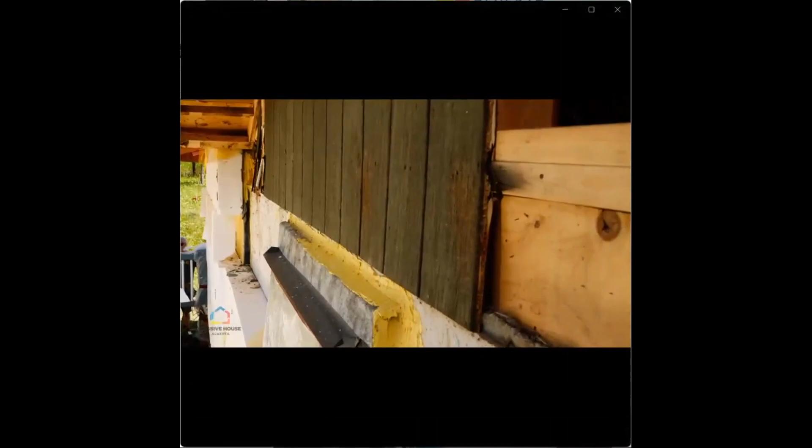So in any deep energy retrofit, one of the first steps you have to do is disassemble a little bit just so you can actually find out what is on site and what's existing. For this project, once we removed the existing siding, we found that in some parts there was stucco. The stucco was determined to be airtight enough that anywhere we came across cracks, we were able to seal them. For another portion of the house, we just found wood.

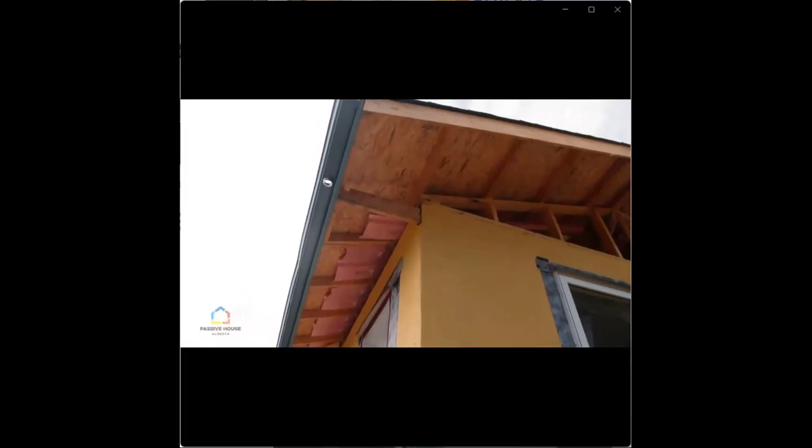In that case, we applied a liquid applied air barrier. For this attic space here, what we ended up doing is removing the sheathing so that we had access to the attic, and that allows us to gain access as well as remove any insulation that needed to be fixed. It will be reapplied, and then we will be air sealing it once we're done the project.

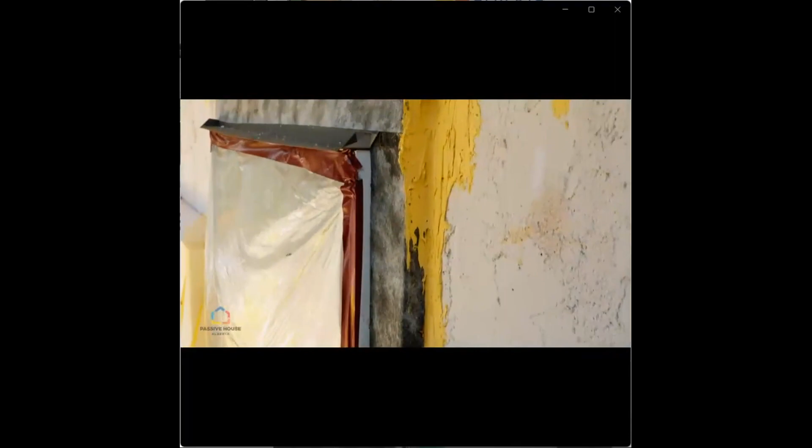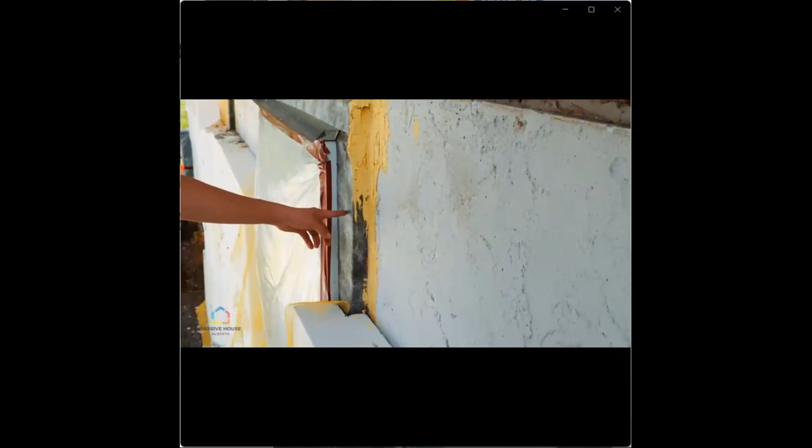So this detail here, we're able to see how with the existing window, we're able to tie it into the stucco so that we have a continuous air barrier. We did use the EIFS tape. We did find that the adhesion between the EIFS tape and the stucco wasn't enough to get a really solid air barrier, so this is where we used the liquid applied flashing.

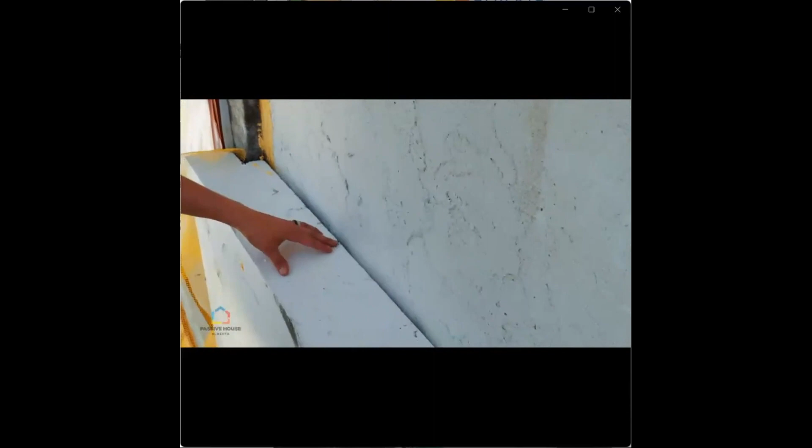So with this detail, you're able to see a drainage gap in between the existing wall as well as the insulation layer, and this is created by the trowel marks when the cement is actually applied, so that any moisture that comes out of the wall is able to drain down and out.

What I really liked about that video is, first of all, that Celia is one of two tradeswomen that are actually part of Peter Darlington's Solar Homes crew. So it's not just tradesmen, it's tradeswomen working on these deep energy retrofit projects. This is what that project was.

It's also showing that when it comes to air control layers, it's not just one material. It's always a combination of materials that go together to create that continuous air control layer all the way around the building. A lot of what I deal with often is not necessarily one system, but the transition between systems. So that video delineated a couple different potential systems there.

I would be interested in how the transition between stucco and sheathing air barrier happened. Any penetration details, that sort of thing—that would have been really integral. That's where these systems tend to fall down.

Yeah, so obviously that's just the shorter one. I think we're at that location for 15 minutes, and we do spend a lot of time showing the majority of the locations there.

They use the yellow stuff, the individual goo—not the correct term—but they also have a different type of trowel-on air tightness membrane that generally goes over top of all the sheathing. They have that black stuff and also a fiberglass tape that transitions over the joints. So we do show how they transitioned over a bunch of materials to make sure you get that continuous air barrier.

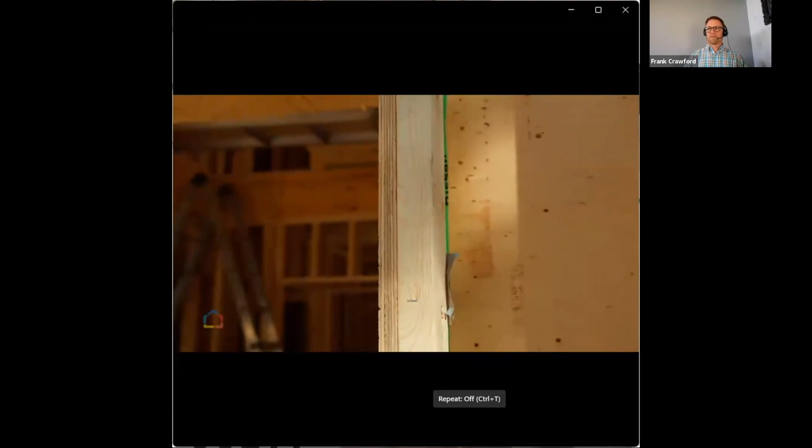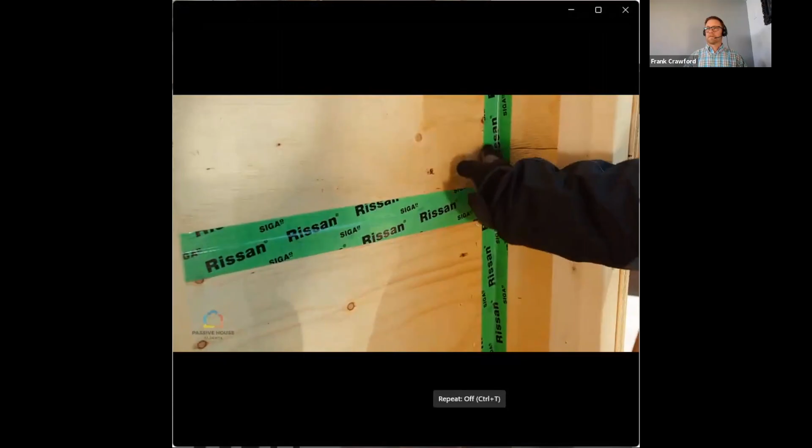As we continue out this deep window rough-in, the plywood that we saw from the inside is acting as a combined air and vapor barrier. So all of the joints have to be taped with a high-performance, vapor-tight, stretchy tape.

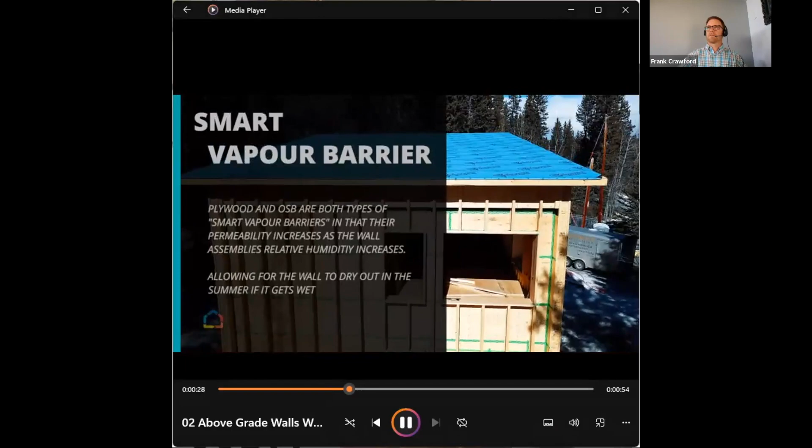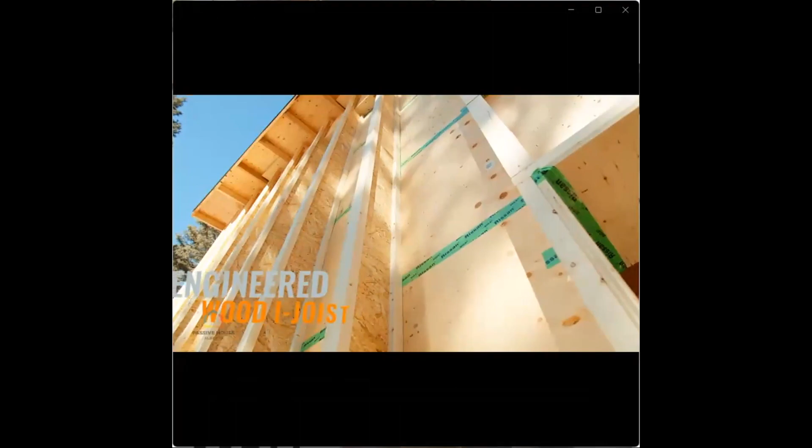To increase the insulation, they make a cavity. The cavity is made with a TJI or a wood I-beam, and then this cavity is covered with wood fiberboard and a weather-resistant barrier. The cavity is filled with dense packed cellulose. So when you take all these different insulations, it ends up as a very high-performance wall system, called either a TJI outrigger, an I-beam outrigger, or sometimes just another type of split insulated wall.

From the inside, this is a very typical 2x6 framed wall. They still try to use advanced framing techniques to minimize the amount of lumber, but it is your basic standard construction. But if we come to this window, you can see that it's sheathed with plywood, and you can tell by how deep it is that it really isn't a code minimum wall.

What I liked about that one is it brings up the concept of a combined air and vapor barrier. In this case, it's actually a combined smart air and vapor barrier using half-inch thick or thicker plywood. It's showing a relatively innovative wood I-joist and dense packed cellulose wall assembly, showing how that plywood is transitioned out. There's another video in this series showing how we connect all the membranes at that wall assembly — we might show that later today. This one was a different single family home, new build.

Questions on this one? What's the permeance of the plywood?

Plywood is what's called a smart vapor barrier. A smart vapor barrier is any material whose permeance changes based on the relative humidity of the cavity on either side. So plywood, when it's over half an inch thick, and OSB, when it's over about 7/16 — basically half an inch thick — has a permeance rating less than 1 perm. Less than 1 perm is what Canadian Code classifies as a vapor retarder, or can be used as a vapor control layer.

So here's the window installation in this wall. This deep wood window rough-in buck-out serves a number of purposes.

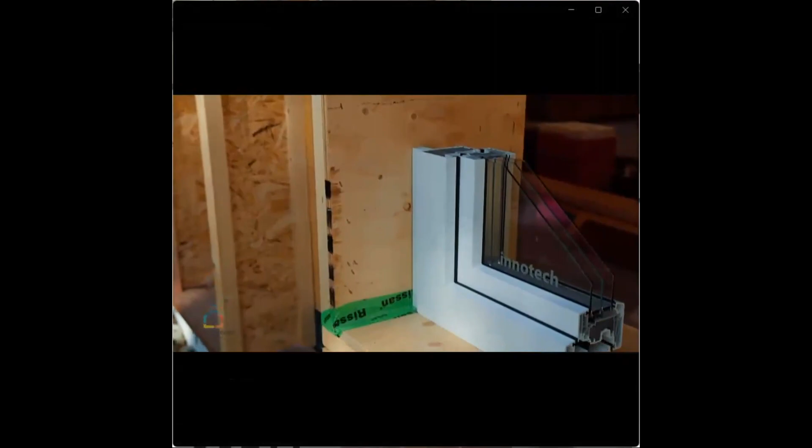The primary purpose is to transfer the vapor barrier from the inside to the outside, because the plywood is a vapor barrier when taped with high-performance tape. The second function is that when the weather-resistant barrier applied to the outside is returned back in, it connects that membrane from the outside to the inside. Finally, it gives us lots of structure to install our high-performance triple-pane windows anywhere within that rough opening. Ideally the windows are installed in the thermal center of the wall, because that's where they perform highest, but that might shift an inch or two depending on the actual window install detail.

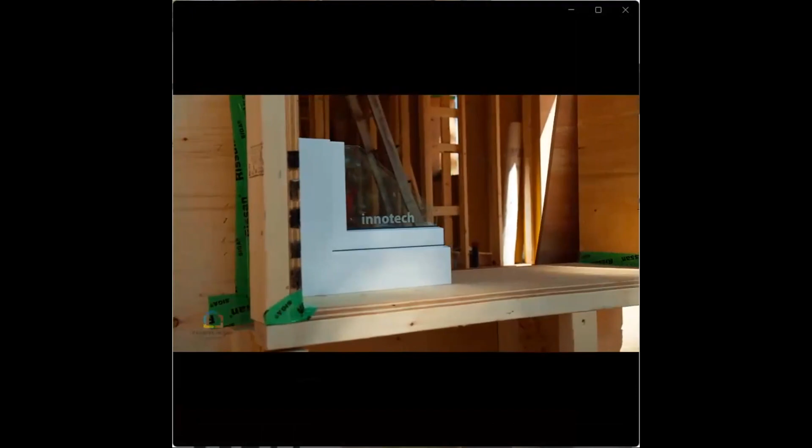Talking about windows, there's a number of different factors that make up the total performance of that window. Obviously there's the glass, there's the frame, but equally important is how that window gets installed. Because if you have a really high performing window and you install it poorly, the window will perform poorly. So we want to maintain the performance of that window.

So here is one excellent detail on how we install this window in a high performance building. First of all, we structurally attach the window. You can use clips or screws - there's various different methods depending on the installer.

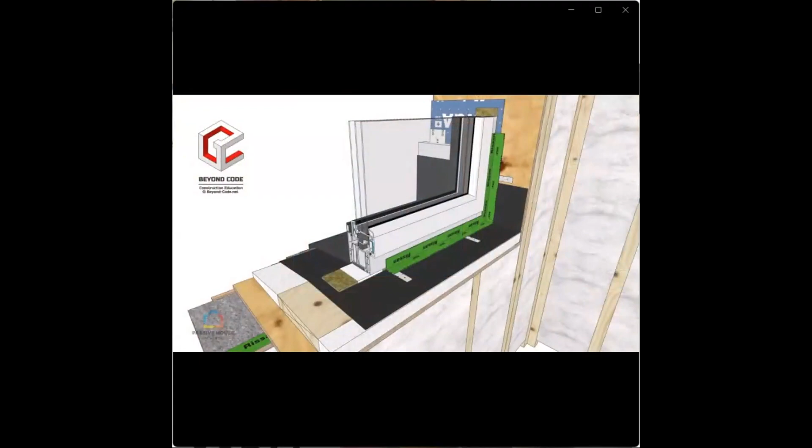But then on all four sides on the inside, we use a high performance tape to connect the vapor barrier of the wall to the vapor barrier of the window, because the window is part of your air and vapor barrier system. That tape is high performance - it's very sticky, it's stretchy, and it has similar permeance ratings as the rest of the assembly. The reason you want it really sticky is because the wall might move, the window might stretch over time, and that stickiness and stretchiness maintains the air tightness over the 50 to 100 years that this wall and building are going to be here.

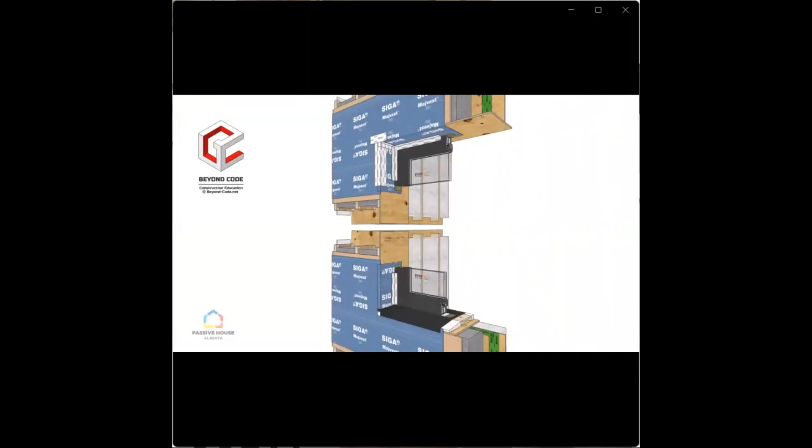So all four sides are taped, wall to the frame, on the inside. On the outside, at least the top three sides are taped - the sill on the outside is dealt with a little bit differently. Next, we want to reduce the thermal bridging of this installation. On the jambs and on the head, they've installed about a half inch of insulation, which helps reduce thermal bridging of this connection detail. On the sill, because the outside slopes down and you can't really insulate it on the outside, we've put about 2 inches of insulation on the inside of the sill. All of these details combine to make an excellent high-performance window installation.

So here's the next progression on that window installation detail. Remember, we still have the foam here, behind this piece of wood. We now put the drywall on. The drywall gets mudded, taped, and painted. You can caulk the seal - it's not part of the airtight membrane, it just gives a nice look.

You might want to put a more durable material on the sill, because people often put pots or plants there since they have a nice deep sill. But you want to make sure you leave enough space so that when you open your operable window, you're not hitting any of the materials. You can still hide as much of that frame as you can with insulation.

So for that one, you might have noticed there were some really cool SketchUp models shown. I agree, they are really cool.

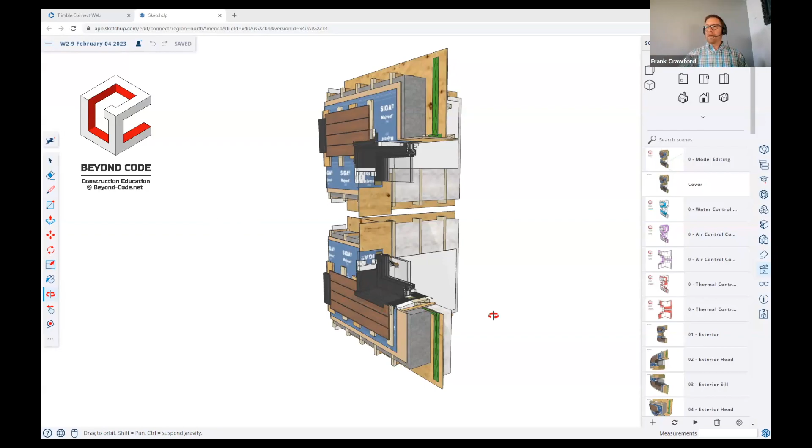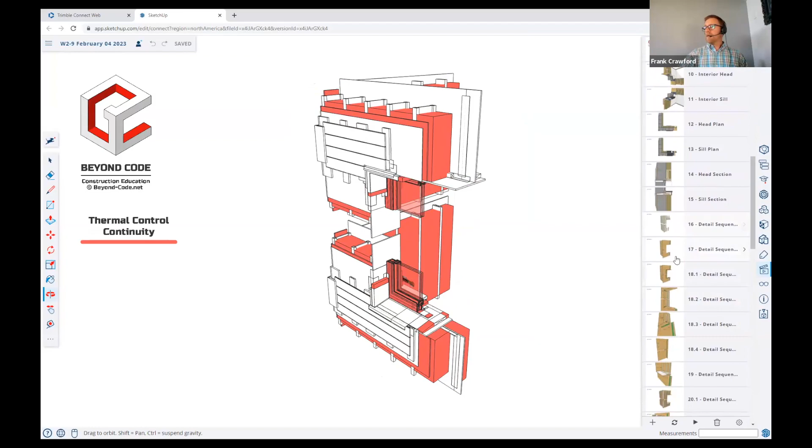They have all of the layers visible, and you can actually move it all around. They'll show you the water control and air control layers from the inside and outside, and show you where all the insulation is. You can even use these items as a virtual wall mock-up so that you can build the building step by step - studs, sheathing, basically every single step of the build.

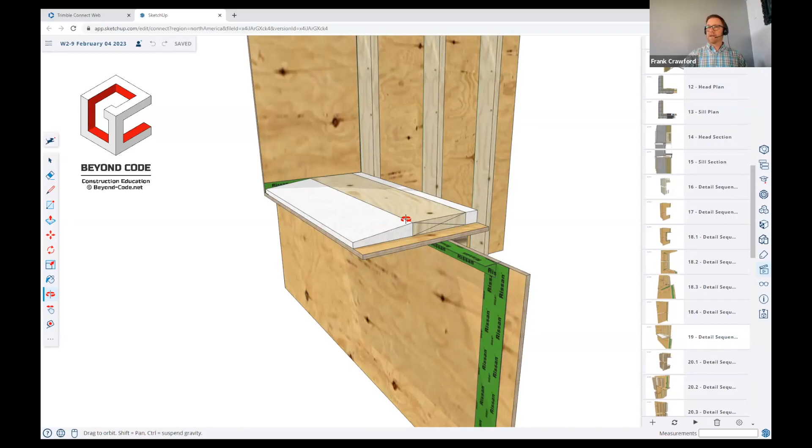I like this detail showing that the sill has a steep flashing. We try to say it's a 4 in 12 slope, treat the sill like a small roof, so some sloped insulation.

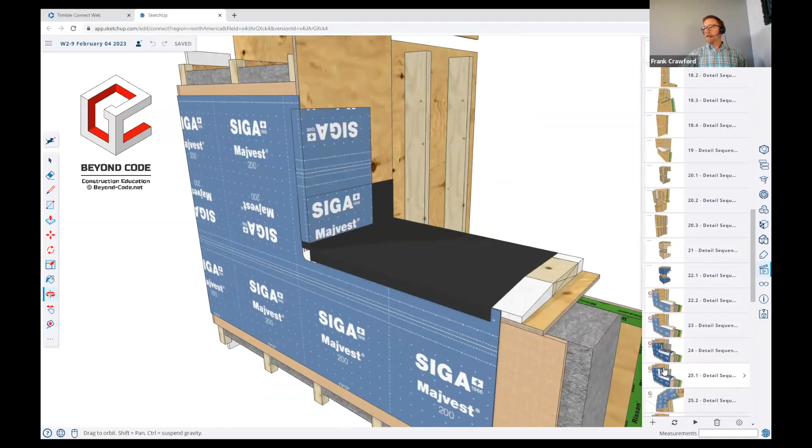Basically it walks you through step by step every single one of the details, showing you exactly how you flash it. There's obviously a number of different ways you can flash it - this is just one of the ways - but it walks you through each step. So you can use it as a virtual wall library, a virtual mock-up, and use it for education for your trades. They give you PDFs that you can give to the trades on site and say, just do it this way. So this is another excellent educational tool.

If you want access to these, they have a growing library that you can purchase for a fairly low rate. If not, they will help you develop custom wall assembly details for any wall you're used to using. This is another great resource we found as part of the grant, and they are offering these for sale. There's the link, beyond-code.net. So any questions on any of these items?

Do we have details? Hopefully the mundane, flanged window walls are fairly well detailed. Do we touch on them? We do touch on them briefly in one of the shorter sections of the videos.

We were actually at Steve Norris's house, and he used a flange window detail on his garage. So we do touch briefly on flanged windows, but most of the other installation details shown here, because we're doing the passive house and high performance method, are flangeless windows. They're installed somewhere around the thermal center of the window, which, if it's flanged on the outside, is not often the thermal center, but depending on your wall assembly, it can be.

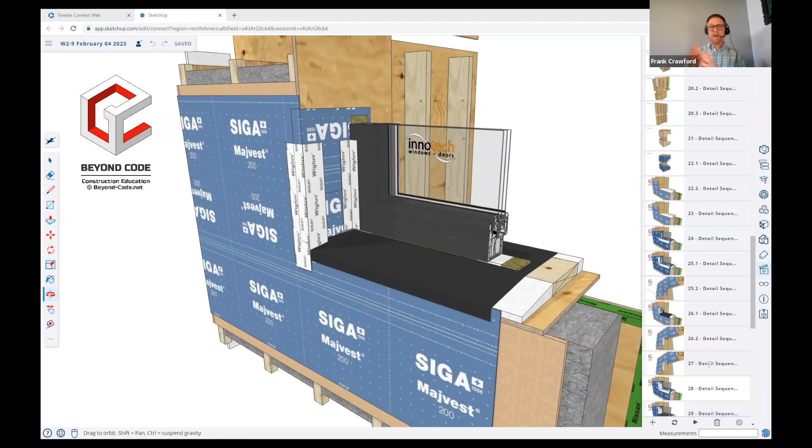Let's continue the conversation about air tightness and connection of those details, staying at Bragg Creek, and look at the connection between the walls and roof.

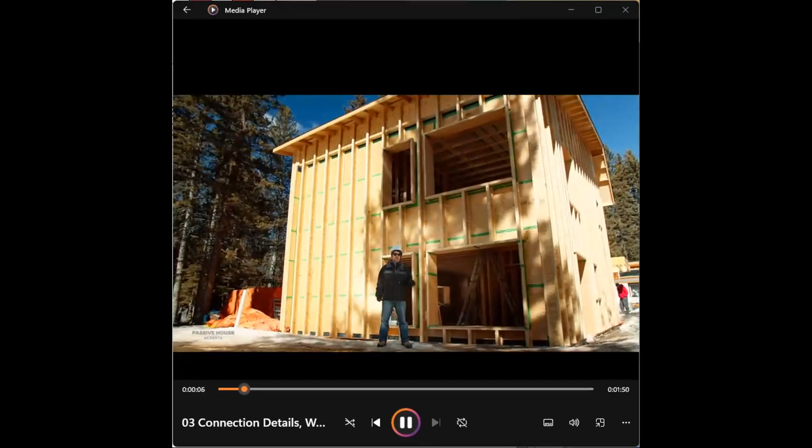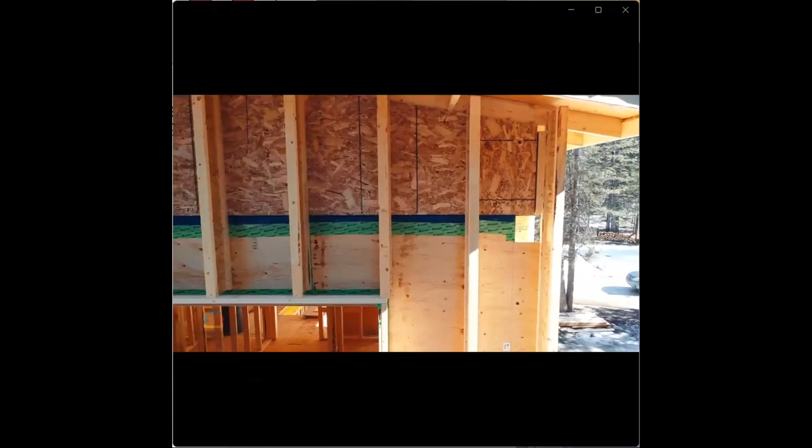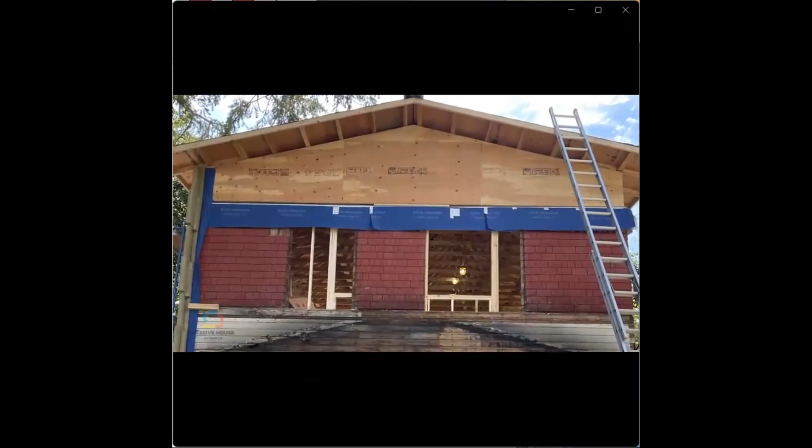Continuity of the air and vapor barriers is paramount in any high performance and passive house building. If you look up to the second story, you'll see that blue strip - that's a strip of weather-resistant barrier placed on top of the wall before the trusses are installed. That allows continuity from the exterior weather-resistant barrier to the inside weather-resistant barrier and vapor barriers, so you get a nice airtight building.

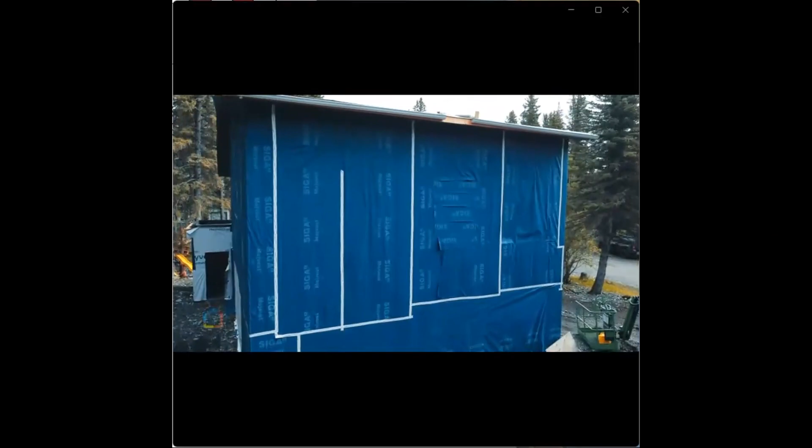As you can see, our wall assembly has progressed so that most of the critical barriers are complete. Remember, the plywood sheathing on the inside is our air and vapor barrier. We have the TJI stud filled with dense packed cellulose, on top of that wood fiber board, and then on top of that a water resistant membrane.

Here we're using the SIGA membranes. It's not part of the air barrier system, and because it isn't, the staple holes and everything don't have to be sealed. If this was part of the air barrier system, these would have to be sealed. But all it's doing is shedding any water that gets behind the cladding and strapping that's going to be installed on top of this.

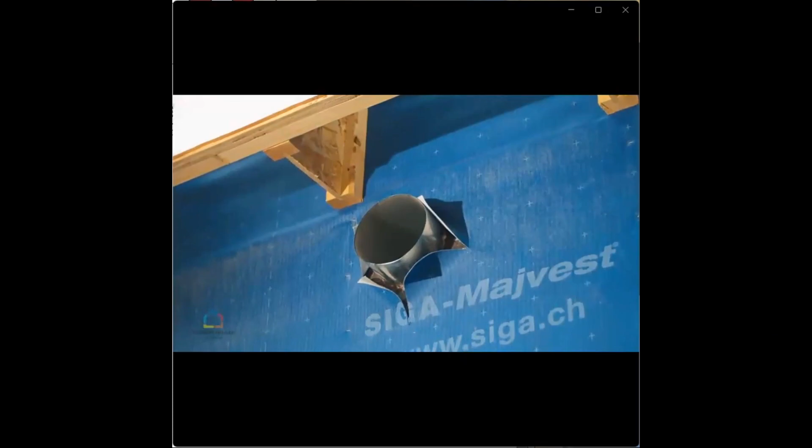Look, this is a pipe coming through. This is not the air tightness membrane, so it doesn't have to be taped and sealed, though they probably will still tape and seal it to make sure water doesn't get inside. Same thing over here with our two in and out for our HRVs - they aren't sealed here, we'll show you how they're sealed on the inside. They will still be taped, but they don't have to be part of the air barrier system, because our air barrier is inboard of this.

So that continues the discussion on this Bragg Creek house, showing how we are still using a WRB as part of our water control layer, or water resistant barrier, but the air barriers are still further back. What's the exterior fiberboard for?

A little bit extra R value, because this was one of the first times we dense packed cellulose with the SIGA membrane. It also acts to create the cavity for the cellulose, but basically it's just a little extra R value. Many places, yours as an example, would leave off this wood fiber board. It's the R value they might have been looking for in Bragg Creek to get to passive house standard performance metrics on a site that didn't have very good access to the sun, with a fair amount of tall trees. They do have an excellent roof solar PV system, but the windows didn't see a lot of sun, so to get the performance metrics they might have needed that wood fiber board, but it isn't needed in all locations.

Now I was asking, how is the cavity filled? So this location, the dense packed cellulose was installed from the outside. Before that wood fiber board went on, they would have netted it with a polyester mesh, which creates a cavity, and dense pack it from the outside.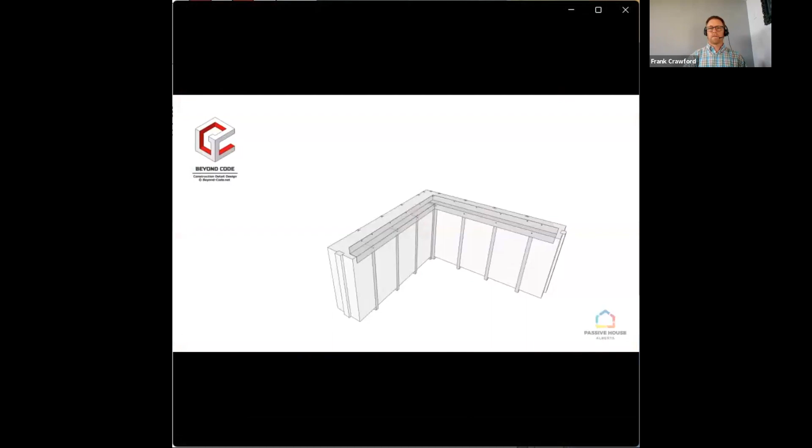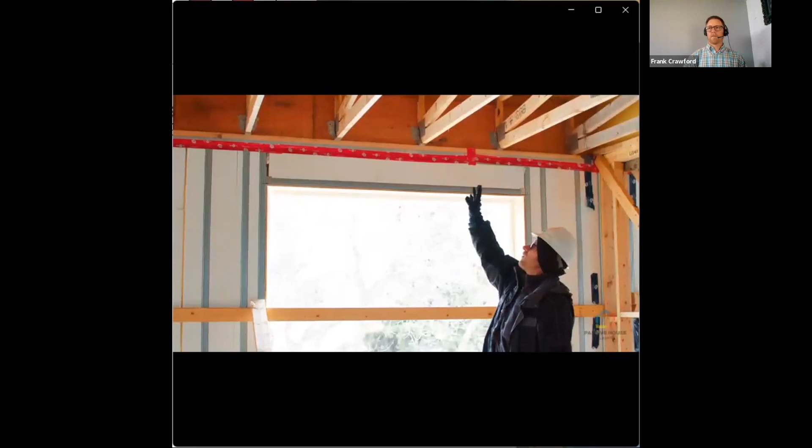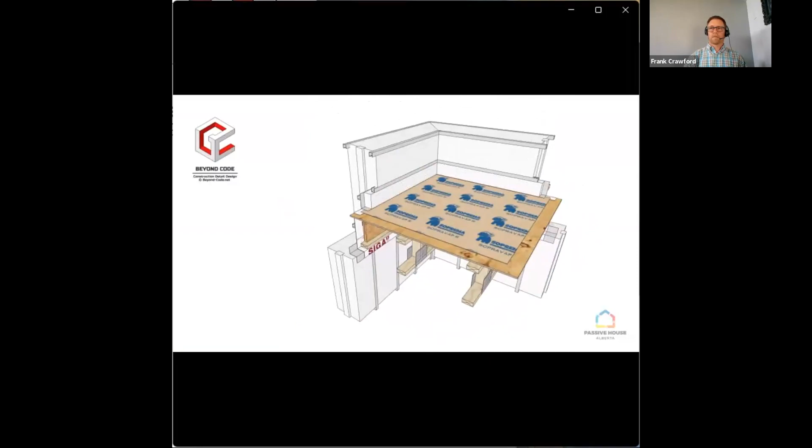So this location, we're at the wall to roof transition, and we're seeing how the vapor barrier is made continuous around that detail, although it can be a similar detail at rim joists. If you look up, these are the roof rafters, and behind that red tuck tape and above is a thick poly vapor barrier, always on the warm side. It's currently just stuck to the wall, but the vapor barrier on the wall will be attached to it. It's there now because when these roof rafters were installed, the vapor barrier goes underneath it and up the outside of the rim joist, then back on top to connect to the roof membrane above this plywood. Then to make sure we're continuing the same R value at this rim joist or roof joist location, on the outside of that we still have a large thickness of EPS foam outside of that vapor barrier.

That's obviously a different wall assembly, actually using the SI Construction Polycore wall assembly. It's steel studs integrated into EPS foam that come prefabricated onto site, and you just build it like large Lego blocks. Obviously the steel studs are a thermal bridge, but they're accounted for and they're all on the inside, and then you have that thick layer of EPS foam on the outside, so you're able to continue that nice wrapping of continuous exterior insulation all the way around the rim joists.

Now I think we'll continue the air tightness trend, and we'll go back to Bragg Creek and show how we actually sealed those penetrations from the inside.

Here we are on the inside of the wall, and here we have the penetration for the HRV, and you can see that it has been nicely taped with high performance, sticky, stretchy tapes, ensuring a long-term airtight seal. Every penetration where we go through the building, anywhere - walls, slab, ceiling - needs to be dealt with just like this.

So that was a quick one. Obviously you can use those tapes, and you can also use rubber gaskets, but basically anytime you have a penetration going through your membranes, we're completely sealing it with a stretchy, sticky membrane to make sure we have that continuity of air and vapor barriers, because the penetrations are generally where you have your leaks.

So I think maybe we'll switch over to some mechanicals now. We did spend some time in mechanical rooms, both on an existing building, and here is the retrofit at Steve Norris's building. So let's look at the mechanicals for a retrofit.

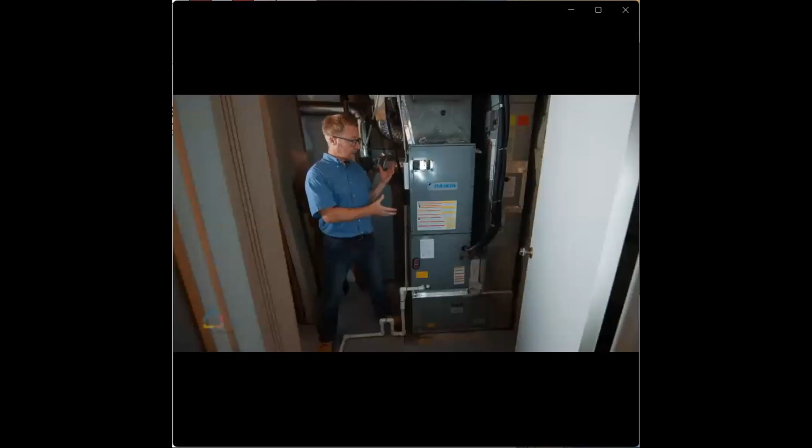We're here down in the basement where the furnace used to be, and it has been replaced with a multi-position heat pump air handler system. The multi-position just means this unit could run this way or that way, so it could be installed in some fairly tight, constrained spaces, but it's running up and down now.

Starting at the bottom, you have some filters, here you have your fan, here you have your two refrigerant lines, and these bring the hot and cold refrigerant from the outside condensing unit into the unit. Here you would have your heat pump coil, which either warms or cools the air that the fan blows over it.

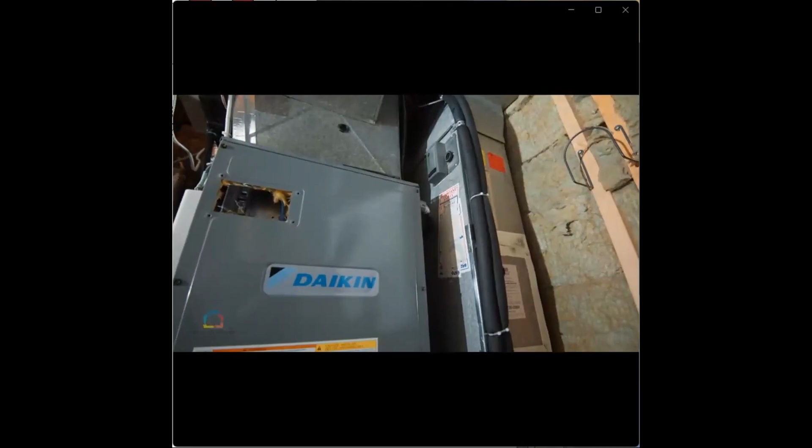Above here we have the electric resistance supplementary heater. So on those coldest days, below about minus 25 with current technology, when the heat pump just can't quite keep up with the demand, the electric resistance heater will turn on a modulating amount to make sure the temperature going out is correct to keep your house nice and toasty warm.

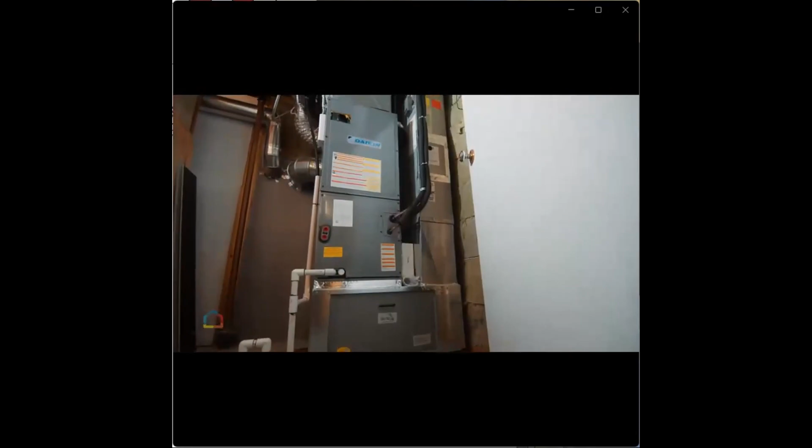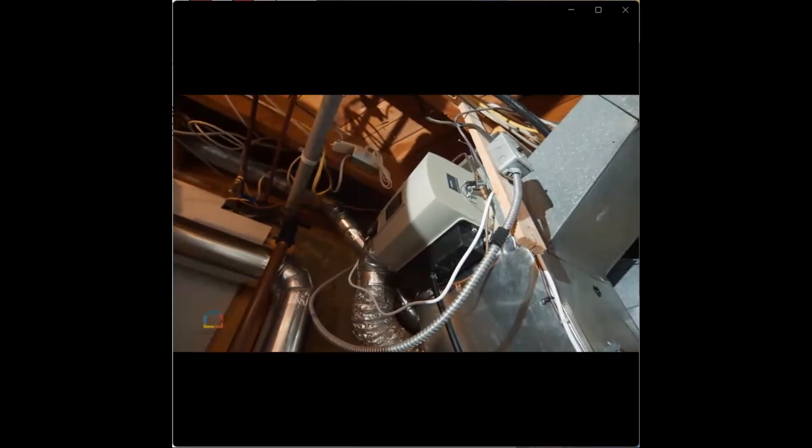The other advantage of this type of equipment is it looks like a traditional furnace, so the subtrades know how to install it, and there isn't a large learning curve with it. You can also use a traditional humidifier or a steam humidifier with this because there's enough airflow, and that allows you to control the humidity going out to the house, so in our cold, dry prairie winters, we can keep it in that nice range we like to see.

We're here in the basement, in the lungs of the house, in front of an ERV or an HRV. HRV stands for Heat Recovery Ventilator, and ERV stands for Energy or Enthalpy Recovery Ventilator. An HRV only recovers the heat, while an ERV recovers heat and moisture.

It does that by using the exhaust air coming from the house - this is the stale, warm, moist air. It goes through this membrane core in the ERV and crosses with the supply air. It doesn't touch, but it crosses, allowing the recovery and exchange of that heat and moisture into our fresh supply air, which now leaves the machine warmer and more moist.

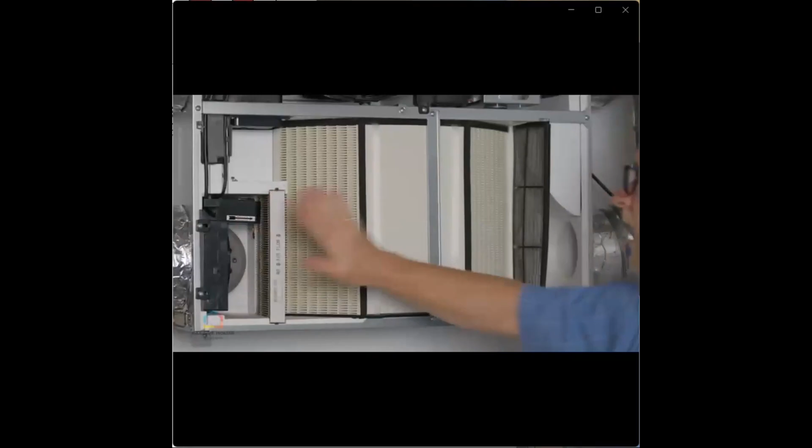You can also see in this unit that we have filters on both the supply and the exhaust. Those filters are there to make sure that air coming from outside, which might have contaminants like pollen, dust, dirt, or smoke, gets filtered out, so that by the time the air goes into your house, it is fresh and clean, and you end up with great indoor air quality.

Leah had another question about the tapes that we saw in the previous video. Yes, we want to make sure that those tapes have long-term testing and will stick to the various substrates in a long-term fashion.

The ones I've seen the testing for include Proclima, the SIGA brand, as well as the Rotho Blaas brand. Those three brands are all from Europe. They've been around since, well, SIGA was started in 1966. So they've been around for a long time, and they all have kind of a 100-year test behind them to show that they do have adhesion to the various substrates for those 100 years of freeze and thaw and stretching and contracting. If you haven't seen them, try to get a sample and you can definitely feel how thick the adhesive is on it.

It's not a bituminous adhesive. It is a solid acrylic adhesive, I believe, which means it actually forms a chemical bond that doesn't off-gas. The problem with some of the bituminous and other adhesives is they're volatile organic compounds, and they might off-gas and eventually stop sticking, which is why if you've seen tuck tape, one of these types of adhesives, after 5 to 10 years it basically just falls right off of the poly. But all of these high performance sticky tapes have a different type of acrylic adhesive that forms chemical bonds that get stronger over time.

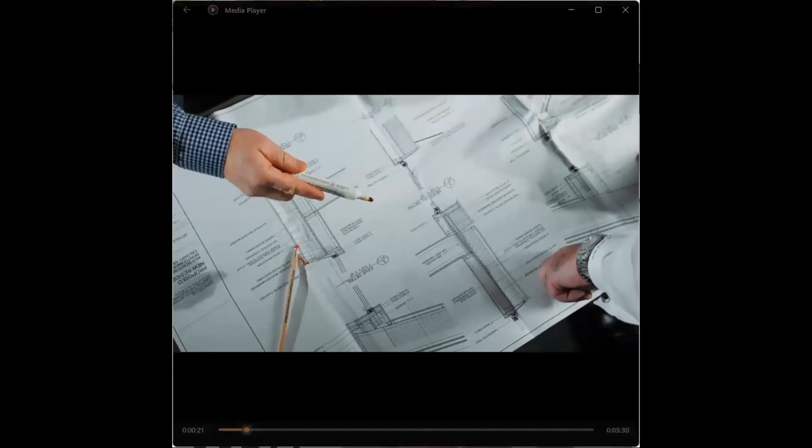An integrated design process, what that means to me is the ability to get many more people at the table earlier. So the design team is integrated, the workflow is integrated, the information is shared much more openly than in a more closed system where it's design, bid, build.

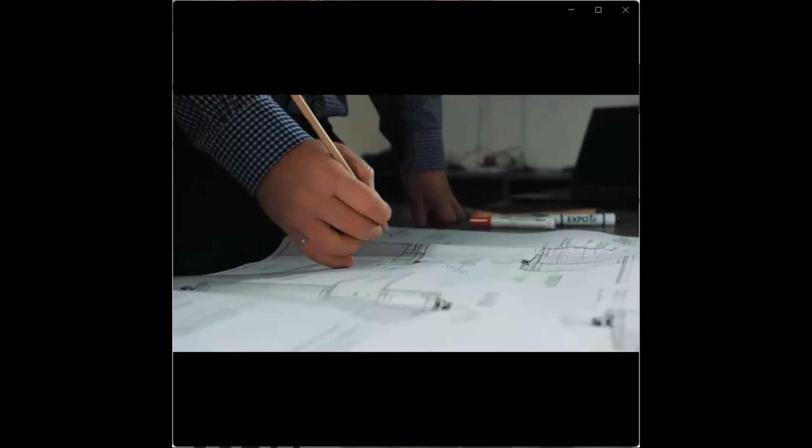Pretty common practice for larger buildings, but in a smaller project, it may not be as extensive. The most important parts of the team are the owner, the general contractor, and any of the design teams, so that might be engineers that might be involved in the project, because everyone has great input into how best to

execute various parts of the project successfully, on budget, and on time. There is a very well-defined myth that I need to keep everybody separate and bid it to death after the fact, because somebody will be dumb enough to give me a low enough price that saves me money. That's a complete myth. The reality is if you invest people earlier and make them a part of your project earlier, hold them accountable to some transparency around cost and help you understand cost, you're not going to get surprises.

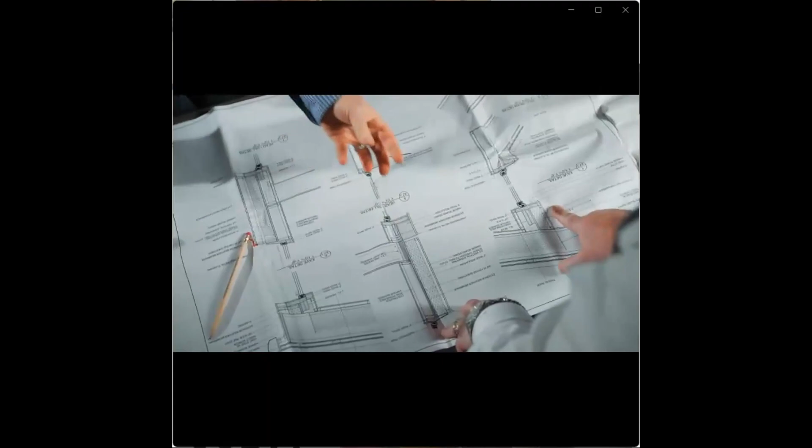The end result is more likely to be closer to what you expected. And you're going to have a fully invested group of trades and technical specialists, as opposed to people who did a low bid and are now working for themselves.

Some people like to use the term massing in terms of what a building looks like, and if you're a passive house enthusiast, you might use the term form factor, both of which are pretty darn confusing. So I think when we're talking about what a building looks like on any site, the first thing we want to think about is orientation, where it is in the world, climate-wise.

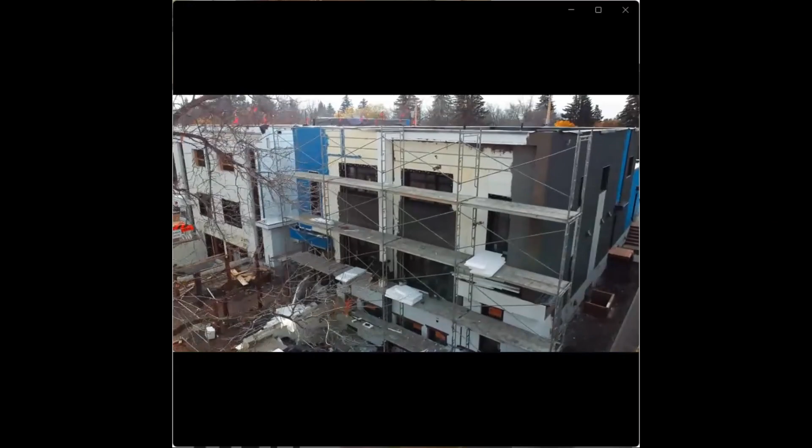Those sorts of things really affect the type of building and the form that the building would take. You want the area of the external envelope, both ceiling, floor, walls, to the volume inside the building to be as efficient as possible. After a circle, a cube is the next best shape that a building can be.

Now, in terms of achieving energy goals, the way a building is oriented and configured, the way natural shading from trees and vegetation are utilized, all these are decisions that can be made that reduce how much the energy systems of the building itself will have to compensate for.

And so if you can reduce a building in terms of how it takes on solar gain, how it is exposed to wind, et cetera, and through the massing stages make these key decisions, they're intelligently linked to your final product. Then, basically through smart design of all these elements, you're not having to install systems that are really there to compensate for, frankly, what is bad design and lazy design that hasn't taken the time to maximize the building envelope performance and all these other elements.

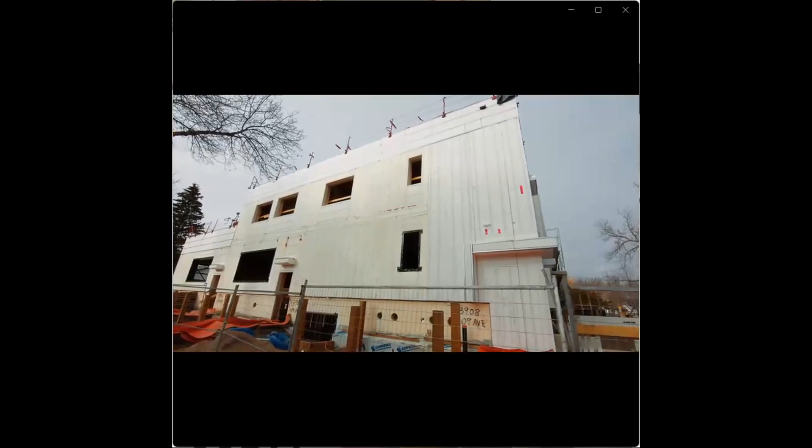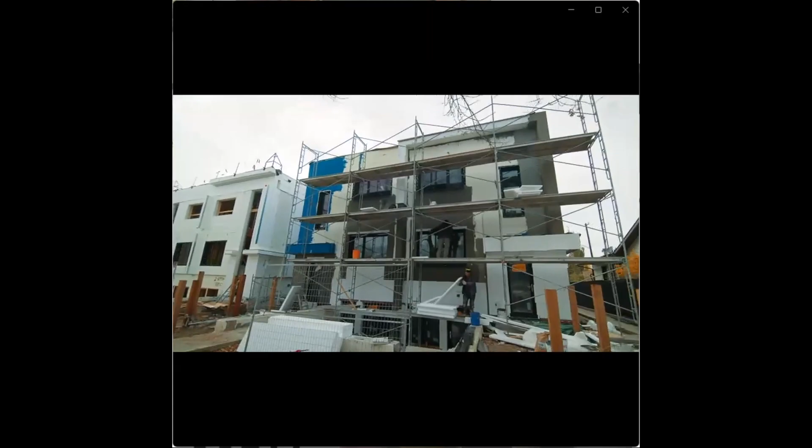Starting to include things that come out of the building from the inside to the outside, cantilevers and bump outs — those sorts of things start to make the building more complex, more expensive, and also start to eat into the energy requirements for the building.

Passive houses tend to have a higher level of comfort. Now, if you chase energy efficiency far enough, and you keep health and comfort in mind with all those parameters for humidity, temperature, drafts, cold spaces and hot spaces, how it feels in your toes compared to your head — if we chase energy efficiency hard enough, the better off you are from a health and comfort point of view.

Everybody wants to be safe, secure, comfortable in their home. Everybody doesn't want their buildings to be costing them too much.

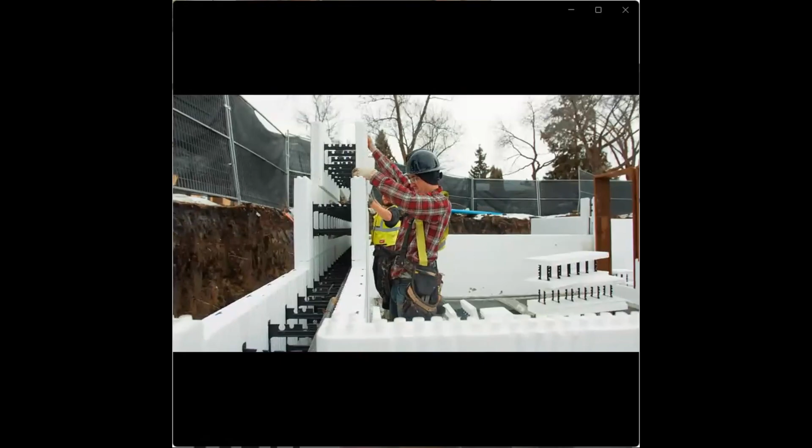Drama is a pretty interesting part of any building, and drama often means vaulted ceilings and or vaulted spaces. There's ways of doing all of those things without creating all kinds of articulations in order to keep the building compact. Illusions of vaulted space can really help in terms of the form of the building.

The simpler it is, the easier it is to build, the less expensive it is to operate. And it's not that all buildings have to be square and ugly — a simple form can be beautiful, and they happen to have a reasonable area to volume ratio.

In terms of multifamily or affordable housing, decreasing the utility costs is a no-brainer. When we build better, these buildings will be robust and last for centuries.